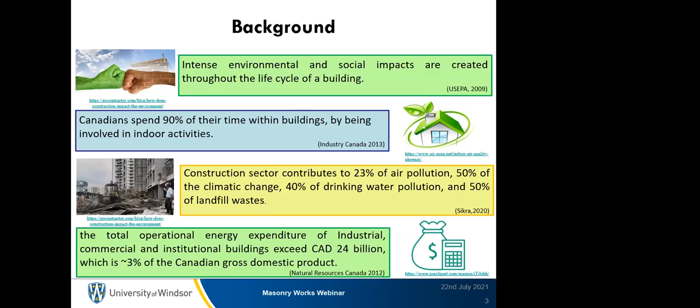Also, nowadays everybody is thinking about making decisions based on the triple bottom line of sustainability. So let's discuss what life cycle sustainability assessment is. Basically, life cycle sustainability assessment refers to the evaluation of all environmental, social, and economic negative as well as positive impacts in the decision making process towards more sustainable products throughout their life cycle.

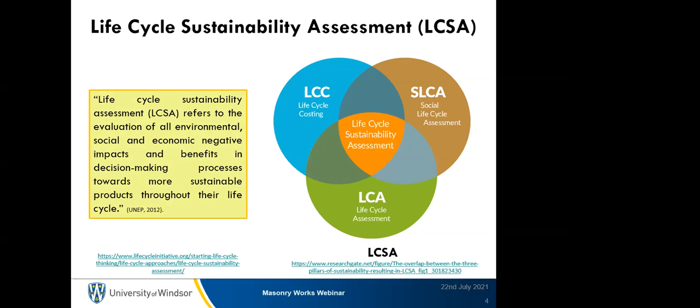Also, why is life cycle sustainability more important to consider nowadays? It considers all three pillars of sustainability, as it includes the social, environmental, and economic aspects. It provides a more comprehensive and detailed comparison of the selected alternatives, and it's a proven, more holistic approach in the decision making process. Moreover, life cycle sustainability assessment supports decision makers in prioritizing resources and investing them where there are more chances of positive impact and the least chances of negative ones.

Also, it supports the consumer in determining which products are not only cost efficient, eco efficient, or socially responsible, but also more sustainable. So fortunately, it helps us to find out the weakness of any product or process throughout its whole life cycle, and enables one to make further improvements through the product life cycle. So that's why the life cycle sustainability assessment is important nowadays.

Let's start with the very first pillar of the life cycle sustainability assessment. That's the life cycle assessment. It's also referred to as life cycle environmental assessment. In general, if we talk about the life cycle assessment, it is basically an objective process that evaluates all environmental impacts generated by any product or process throughout its life. It consists of material extraction, manufacture, transportation, utilization, reuse, and disposal.

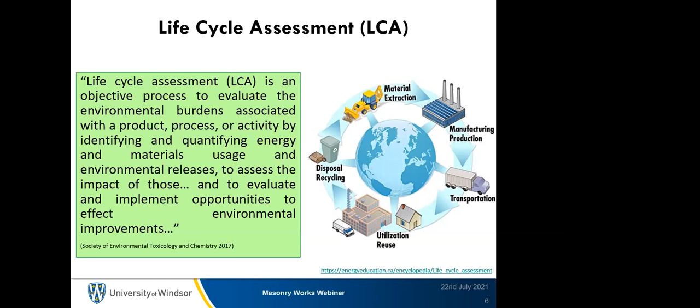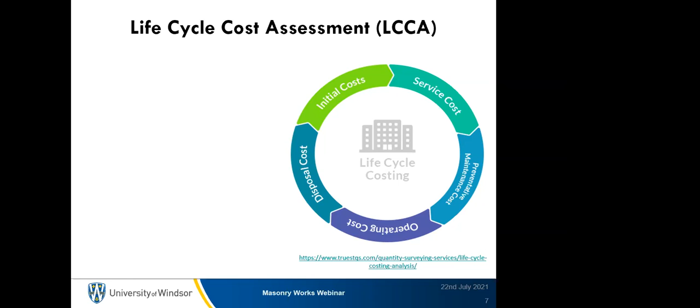Similarly, if we talk about the cost, the life cycle cost analysis considers the different costs associated with any product or process throughout its life. Basically, it contains initial cost, service cost, maintenance cost, operation cost, and disposal cost of the waste. So those are the different types of costs associated with the different activities throughout the life of any product or process.

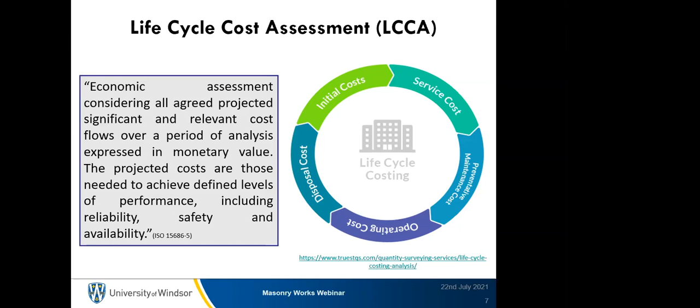Moreover, as I mentioned in the background, 90% of the time is spent by Canadians in indoor activity, so the social life cycle is also one of the most important aspects of this analysis. Again, the social life cycle assessment considers all the social impacts generated by any product or process, whether positive or negative impacts on the community, throughout its life cycle. It also provides a holistic and systematic tool to understand the social issues that may arise in the value chain of products and services sustaining human life today.

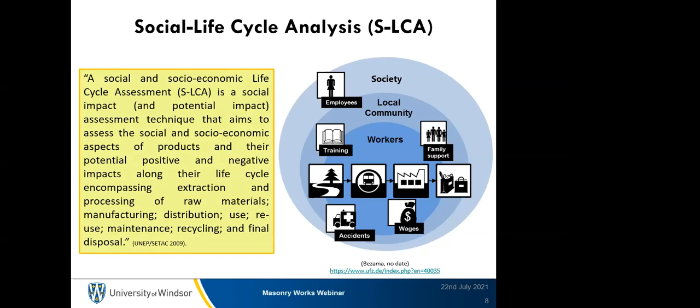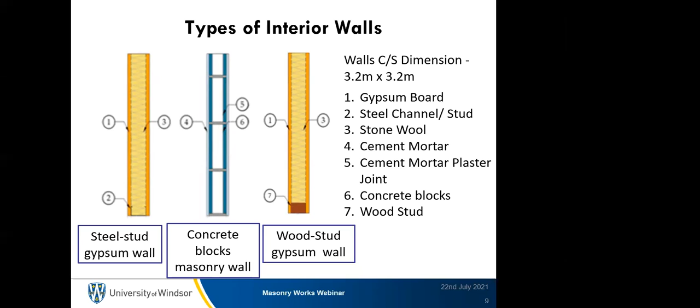Next, I would like to jump directly to my study, which is basically on interior walls. For this study, I considered three different interior wall construction methods available in Canada: the steel stud gypsum wall, the concrete block masonry wall, and the wood stud gypsum wall. The cross-sectional dimension considered for these walls is 3.2 meters by 3.2 meters.

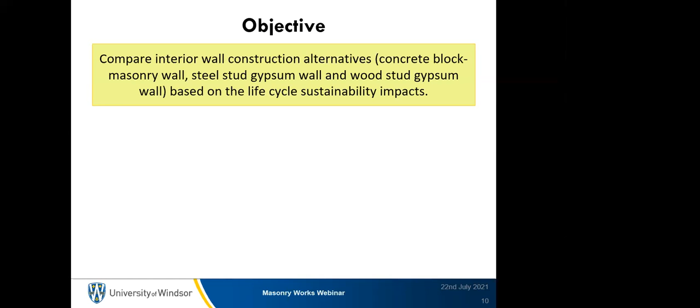So based on the importance of the life cycle sustainability assessment and the impacts of construction in a sustainable built environment, I started my research with this overall objective: to compare the interior wall construction alternatives based on life cycle sustainability impacts. To achieve this overall objective, I subdivided it into four sub-objectives.

The first one focuses on the environmental life cycle impacts. The second sub-objective is to evaluate the economic life cycle impacts of the three different walls. The third sub-objective is the social life cycle impacts of the three interior wall construction methods, and the fourth sub-objective is to compare all three interior wall alternatives based on all three pillars of sustainability.

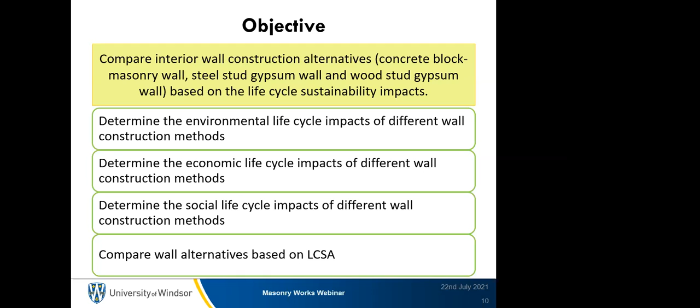The methodology selected for this research is based on ISO 14040 and 14044, which provide all the basic and necessary steps to carry out the life cycle assessment. I also referred to ISO 15686 Part 5, which gives detailed descriptions of the different costs associated with the life of different products, and the United Nations Environment Programme guidelines, which help me carry out the social life cycle impact assessment.

Basically, the methodology follows four different steps. The first one is goal and scope definition. The second one is the inventory analysis. The third is the impact analysis, and the fourth one is the interpretation of the results. The impact analysis is carried out for the different pillars of sustainability. I used different software and databases.

For the life cycle environmental assessment, I used the ecoinvent database and the BEES method. Using this database, I assessed the environmental impact of the three interior wall types in SimaPro software. I also used the RSMeans cost database to evaluate the economic impacts of the interior wall constructions.

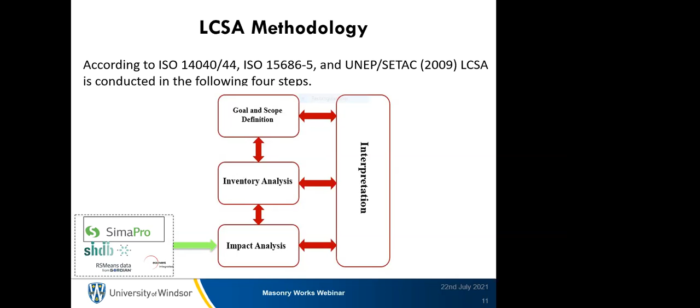Let's start with the first step of the life cycle sustainability analysis: the goal and scope definition. As mentioned earlier, the objective of this research is to analyze the life cycle sustainability impact of the interior wall construction alternatives.

For this study, I used the functional unit as a 3.2 meter by 3.2 meter, the cross sectional dimension of the wall. The system boundary used is cradle to grave, consisting of raw material extraction to the end of life of the material. I also consider the reusability of the waste material in this analysis.

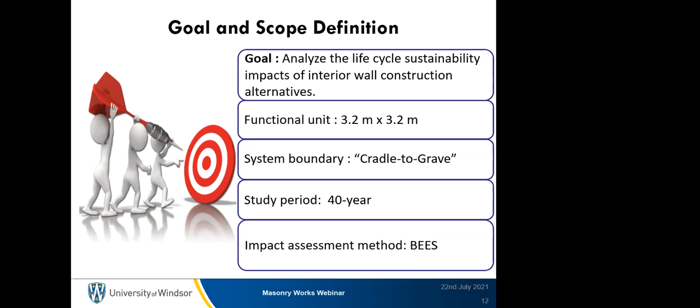The study period considered is 40 years, based on literature values. I also used the BEES method to assess the environmental and economic aspects of sustainability. The next step of this analysis is the inventory analysis.

This table shows the three different interior wall construction methods, and details about the layer distribution, the dimensions considered for the analysis, and different materials used for the wall construction, also for the environmental impact analysis.

I considered two assumptions. First, the gypsum board and the stone wool are totally considered as waste material, and at the end of its life, directly go to the sanitary landfill. Second, 95% of the waste generated from the concrete block walls is reused in other concrete construction work and road sub-grade after its end of life.

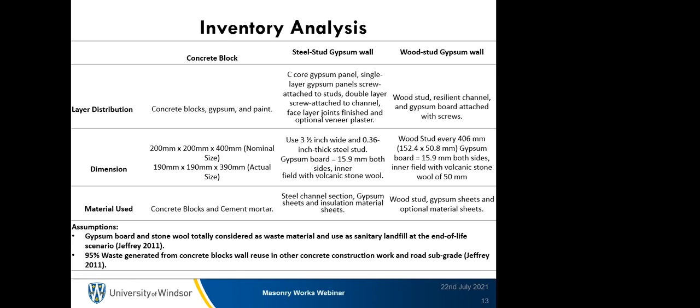Also for the life cycle cost analysis, I consider this inventory data. The life of wall is varied because the durability of the concrete masonry block walls is quite higher than the steel stud and wood stud gypsum wall. We are facing several issues with uncertainties regarding the life of wall and maintenance activities.

The cost data used is based on the RSMeans cost database. Also for the life cycle cost analysis, I consider 95% of the concrete block material reused after its end of life.

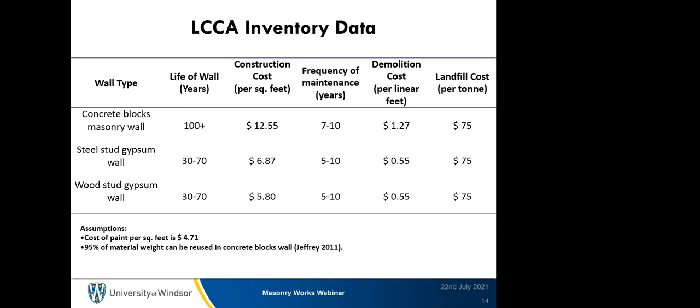The next step is the life cycle assessment result. This table elaborates the 13 different environmental indicators and their characterized results based on the three different interior wall construction methods.

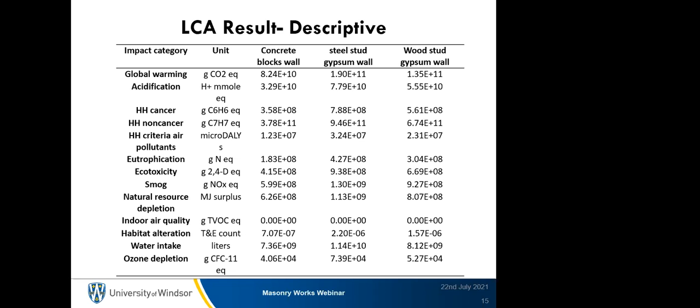Based on these LCA results, it shows that natural resource depletion, smog generation, and eutrophication are the three major indicators affected through this kind of construction activity.

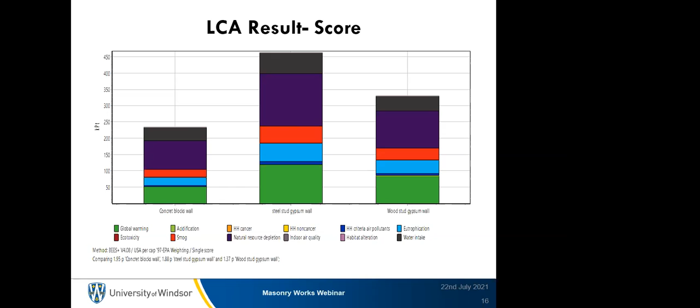Also, it shows that at the cradle to grave boundary conditions, the concrete block masonry walls come as a more environmentally friendly option than the steel stud and wood stud gypsum wall because of the reusability of the waste concrete material after the end of its life.

The next result is the life cycle cost assessment. Life cycle cost is evaluated using this formula, which consists of different costs associated throughout the life cycle of the interior walls. I consider initial cost, maintenance cost, demolition cost, and also use the salvage value to find out the life cycle cost of these interior walls.

The result indicates that at the cradle to grave boundary condition, concrete block walls perform better, proving a more economic option than the steel stud and wood stud gypsum wall because of maintenance activities. For this study, I only considered painting as a maintenance activity.

However, the work is still going on in the life cycle cost analysis, and I already floated a questionnaire survey in the industry to find out more maintenance activities associated with interior wall construction. So the result will be validated after the life cycle costing questionnaire survey data.

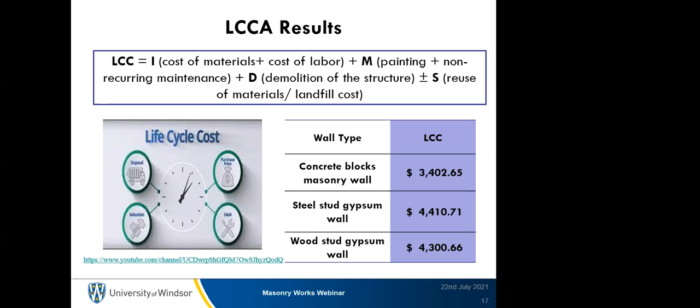The next results are the social life cycle impact assessment results. You can see the results of the 25 different subcategories of the social indicators, and the results are provided in medium risk hours.

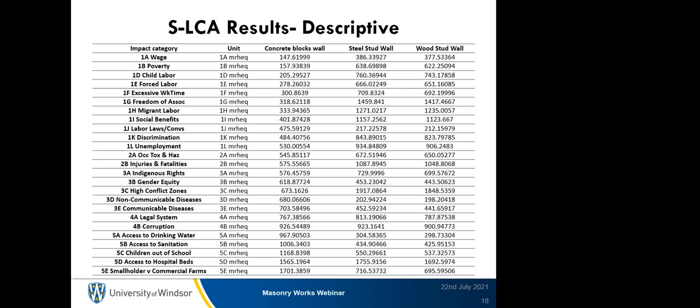For an easier way to elaborate those results, those 25 different subcategories are separated into five major categories: labor rights and decent work, health and safety, human rights, governance, and community.

The next one is the fourth sub-objective of this analysis: the life cycle sustainability assessment result. Here I compare the three interior wall construction alternatives by all three pillars of sustainability, and I use normalized score value to assess these alternatives.

This graph shows that the concrete block wall comes as the more sustainable alternative among the three selected alternatives. If we talk about environmental impacts, we can see the steel stud impacts more, or performs poorly in environmental indicators, with almost a 0.47 impact point.

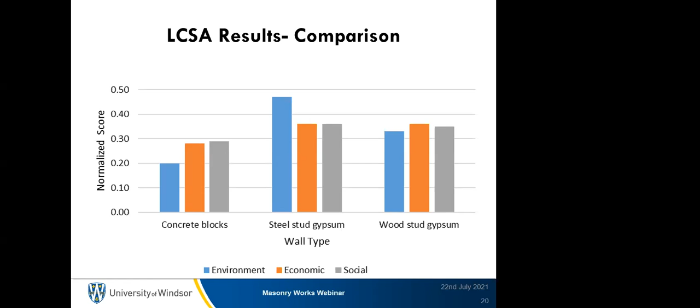Based on this evaluation, the life cycle analysis or environmental impact assessment shows that concrete block masonry walls impact 49% and 21% less than the steel and wood stud gypsum wall. If we talk about life cycle cost, concrete block masonry walls cost almost 23% and 20% less than the steel and wood stud gypsum wall respectively.

If we consider the social impacts of the wall alternatives, concrete block walls also perform well in the social indicators, creating 18% and 15% less impact than the steel and wood stud gypsum wall.

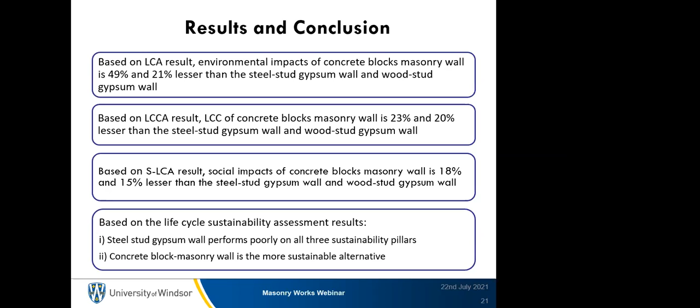Based on these results, I concluded that the steel stud gypsum wall performs poorly in all three sustainability aspects, while the concrete block masonry wall is the more sustainable alternative, as it provides more sustainability across all three pillars.

This research has one publication that focused only on the life cycle assessment part, covering the environmental impacts of interior wall construction, presented at this year's CSCE 2021 conference. The research is still ongoing.

As I mentioned, the questionnaire survey for the life cycle cost analysis part is currently underway, so I'm working on that. Also, I'm trying to start working on the long-term physical condition assessment of the interior wall for this study.

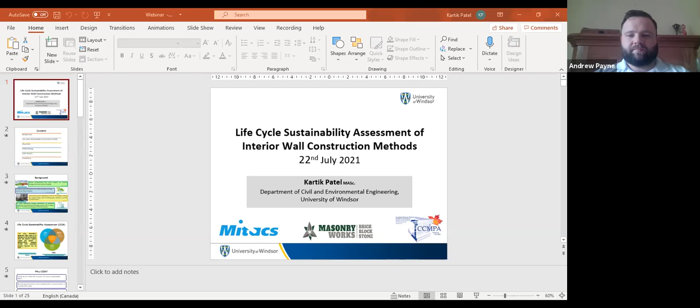Okay, well with that, let me ask a question for Kartik myself - maybe this is something that can further elaborate on certain things we did in this research. For example, we used social life cycle assessment. Maybe Kartik can elaborate on that part, since it's something not considered in many life cycle assessments, but we were able to get access to some updated databases that allowed us to perform that.

Can you explain more about the social life cycle assessment that you did, Kartik? Yes sir, definitely. As Dr. Ruparathna just said, even in the many literatures I referred to that perform life cycle assessment, the social impact is always considered, but not in the way that's actually required to focus on the social aspects.

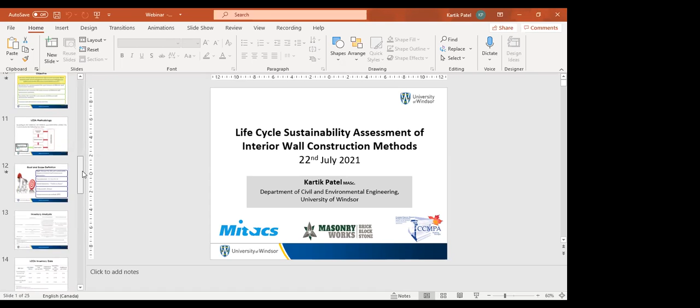So in the context of social life cycle assessment, I used the social hotspots database. That's a database that provides a very wide range of data - it provides country-specific data for each and every country. For this research, I considered the Canadian context database and performed my evaluation.

This research also provides assessment in terms of medium risk hours, consisting of the risk and wage required for each of the 25 subcategories of social impacts. To elaborate those results more clearly, it provides normalized results, weighted results, and point-based results, so a person unfamiliar with that aspect of evaluation can easily understand what the results indicate.

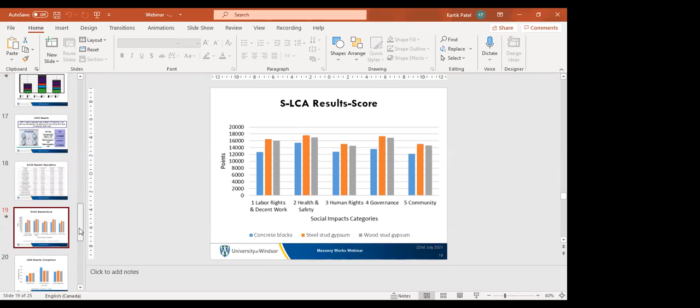So the social life cycle - I used the Social Hotspots Database for this analysis. I think that's a major impact category, similar to the environmental and economic ones, because there are lots of subcategories. We can see the wages, the accessibility of resources - those are major factors that people still aren't considering in research activities, but they highly impact the community.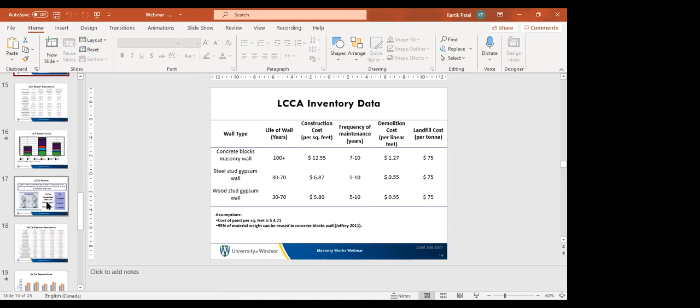What about the cost data you used? Cost data can vary significantly based on region and time. Yes sir, the cost data varies with regions and time to time, so there's several uncertainty associated with the life cycle cost. To overcome that, I used the @RISK software and performed uncertainty analysis for the life cycle cost, and based on that I calculated the life cycle cost of the three interior wall constructions.

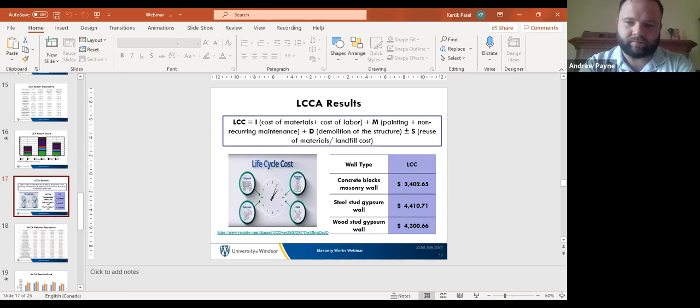I think that touches on the question in the chat box - the life cycle cost assessment, was painting the only maintenance required of the block in the 7 to 10 year life cycle? In this study I just considered painting as the maintenance activity, because that's the only thing I could find from the literature that gives me year ranges.

There are other maintenance activities, like condensation issues and water leakage issues in the interior wall. Those things also impact the life cycle cost because several kinds of maintenance work are required. But those things are not fixed - they are uncertain.

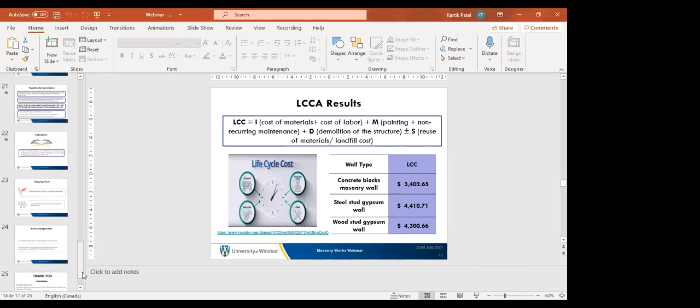To find more detailed supportive literature work for those calculations, I already floated a questionnaire survey in the industry. Based on the results from that survey, I'll find out what other maintenance activities still need to be considered in this evaluation, and that will help me validate the life cycle cost result. That work is still ongoing for this study.